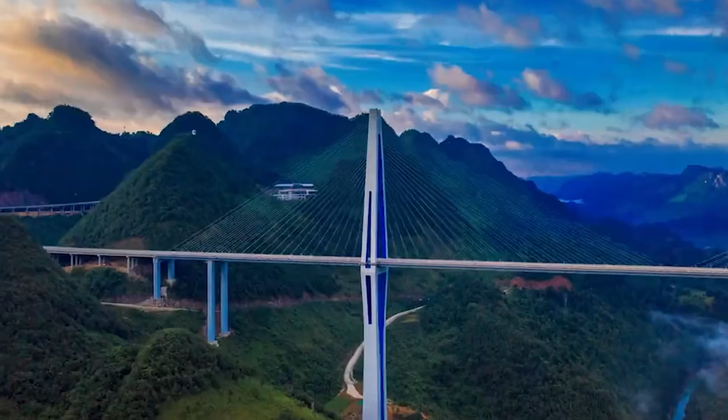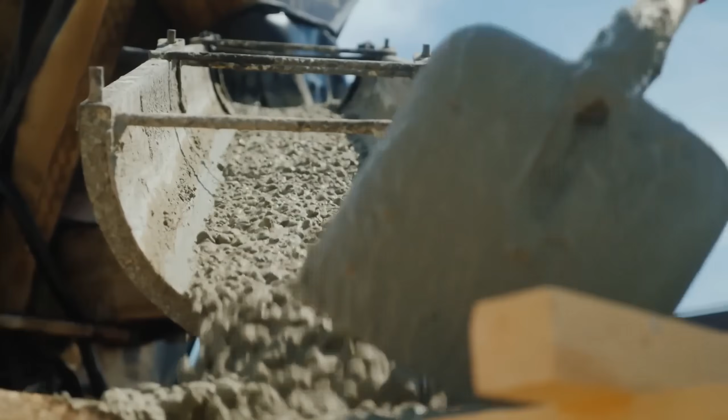Every bridge held together by steel rebar is already rusting from the inside, and nothing can stop it. Not because engineers are careless, not because the concrete is bad. Steel and moisture cannot share 100 years without a fight, and that fight is quietly bankrupting infrastructure budgets worldwide. Right now, in factories most people have never heard of, a different rock is replacing the metal everyone assumed was

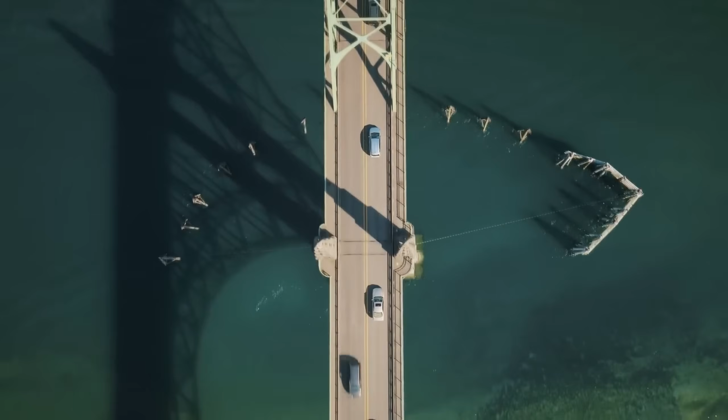permanent. Steel rebar corrosion sounds like a maintenance footnote. It is not. When chloride from de-icing salt or seawater works its way through concrete and reaches the steel inside, the metal begins to rust. Rust takes up more volume than the steel it replaces, so as it expands inside the concrete, it pushes outward, cracking and splitting the surrounding material from the inside out, long before any damage is visible on the surface.

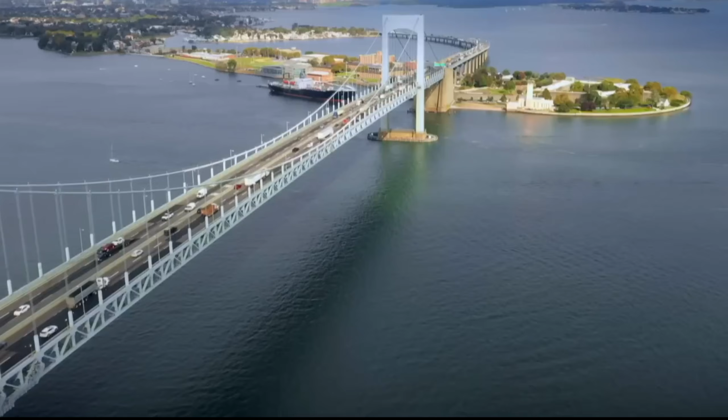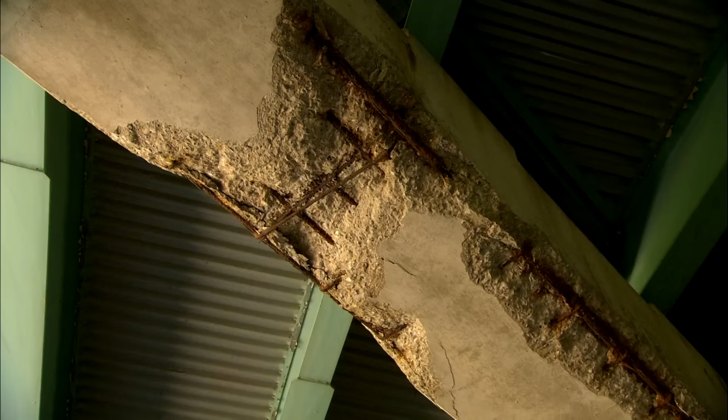The Federal Highway Administration puts the direct annual cost of this process, just for highway bridges in the United States, at roughly $8 billion a year. Factor in traffic delays, lost productivity, and detours, and independent estimates put the real cost at more than 10 times that figure. Corrosion overall, across every industry, is estimated to cost the American economy over $270 billion a year, and reinforced concrete infrastructure is one of its biggest single-line items.

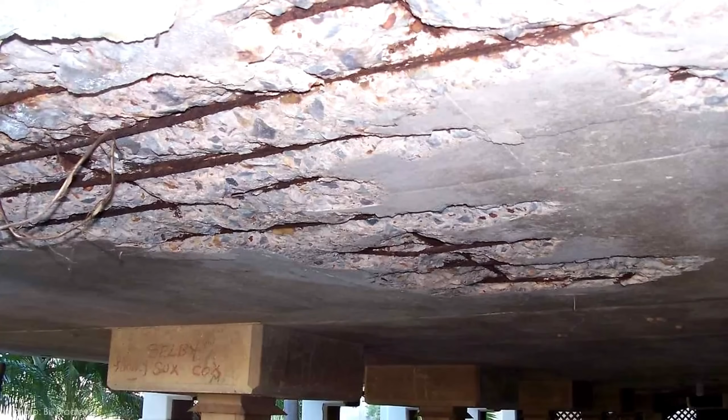This is not a fringe problem hitting a handful of unlucky structures. Over half of the bridges in America are reinforced concrete, and corrosion of the embedded steel is the single most common reason they fail before their design life is up. For more than a century, the construction industry has simply accepted this as the price of building with steel, because nobody had a real alternative. That is no longer true.

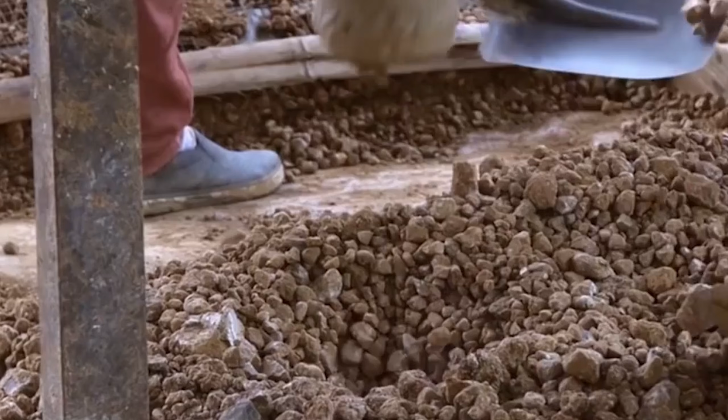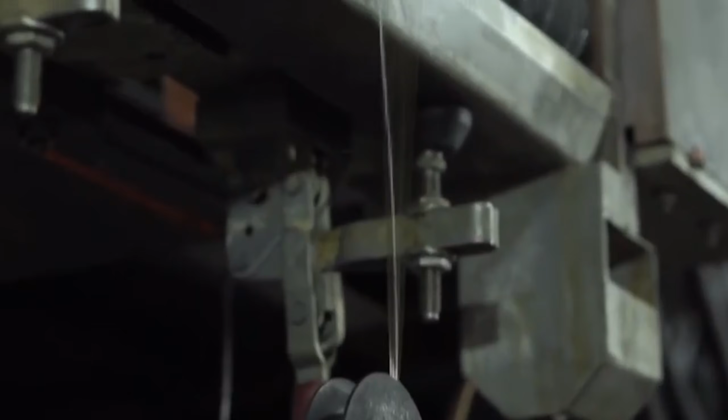The alternative comes from an unlikely place: volcanic rock. Basalt is one of the most common rocks on the planet, and it turns out that when you melt it down and draw it into thread-thin fibers, the same way glass fiber is made, you get something remarkable. Basalt fiber reinforced polymer, or BFRP, is manufactured through a process called pultrusion. Continuous strands of basalt fiber are pulled through a resin bath, usually vinyl ester or epoxy, and cured into straight, ribbed bars that look almost exactly like the steel rebar they are meant to replace.

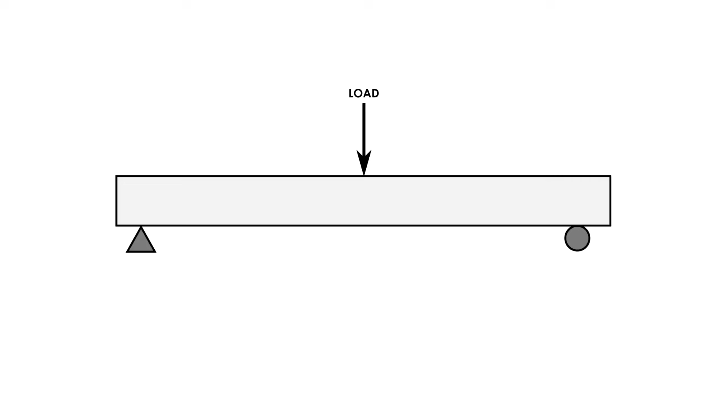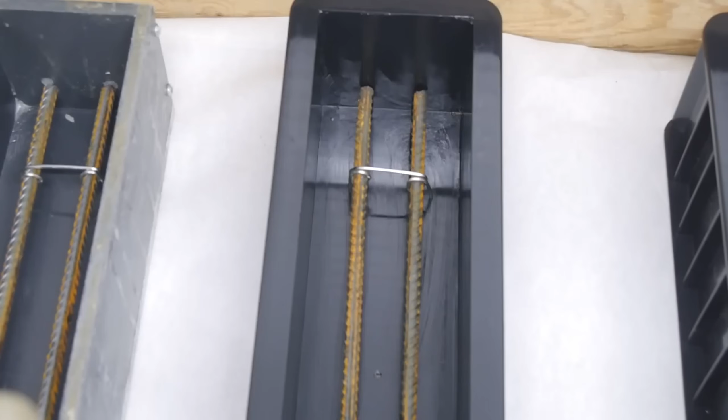The fiber itself sits in strength somewhere between fiberglass and carbon fiber, offering tensile properties higher than standard glass fiber without the extra cost of carbon fiber. And because the reinforcement is stone, not metal, water and chloride simply have nothing to attack. There is no rust reaction to trigger, because there is no iron inside it to oxidize in the first place.

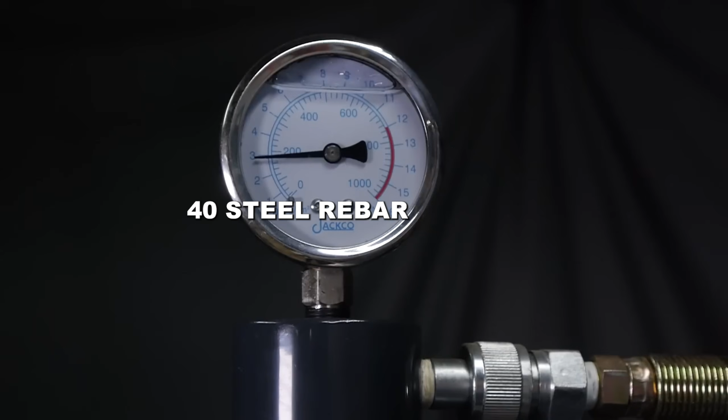Here are the numbers that actually matter to an engineer. Independent testing on commercial basalt rebar puts its guaranteed tensile strength at around 145,000 pounds per square inch, with average results closer to 164,000. Compare that to ordinary grade 40 steel rebar at 70,000, or grade 60 at 90,000. And basalt is not just competitive, it is roughly double the strength of the steel most buildings actually use.

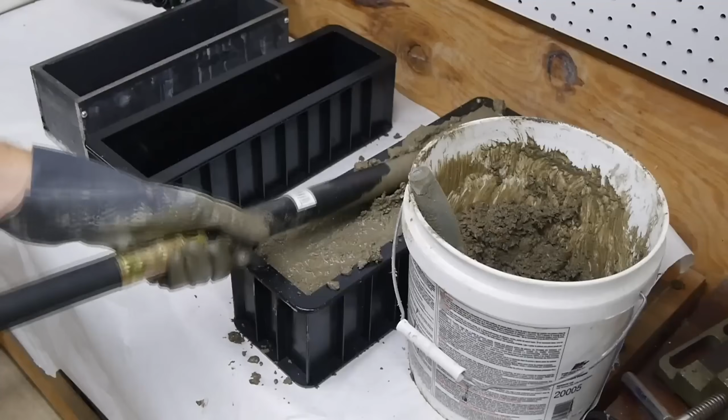It manages that while weighing about a quarter to a third what steel weighs for the same size bar, which means lighter trucks, easier handling on site without mechanical lifting equipment, and less dead load on the finished structure. Density runs around 2 to 2.7 grams per cubic centimeter, against 7.85 for steel.

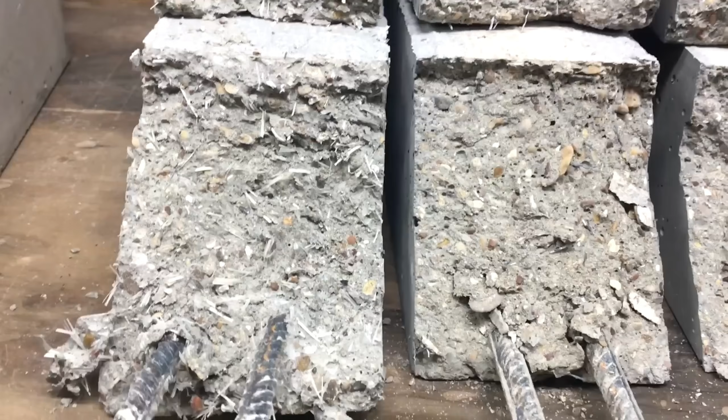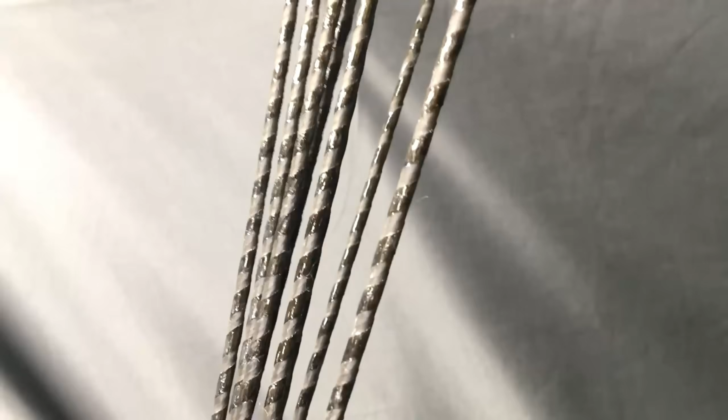Separate research on basalt fiber itself, rather than the finished bar, measured tensile strength as high as 4,800 megapascals in some samples, which is why manufacturers describe it as sitting between glass and carbon fiber, rather than anywhere near ordinary construction materials. For any structure where corrosion, not raw compressive load, is what eventually kills the concrete, that combination is close to ideal.

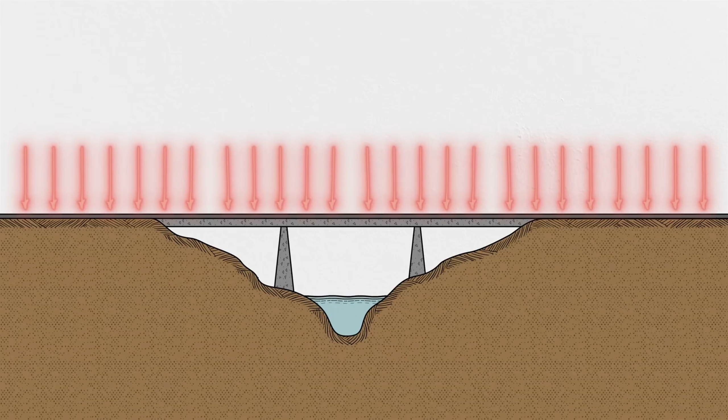The bond between the bar and the surrounding concrete matters just as much as the bar's own strength, and here basalt has quietly outperformed expectations too. Studies on sand-coated, helically wrapped basalt bars found a bond coefficient of 0.8, meaning the bar grips the surrounding concrete more efficiently than the conservative value of 1.4 that codes still assume for ordinary fiber-reinforced bars.

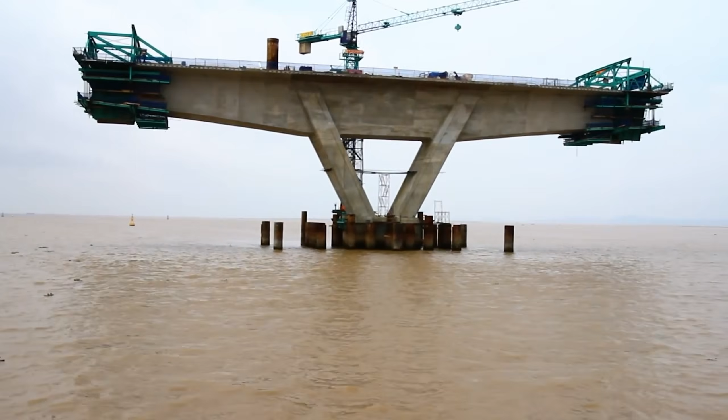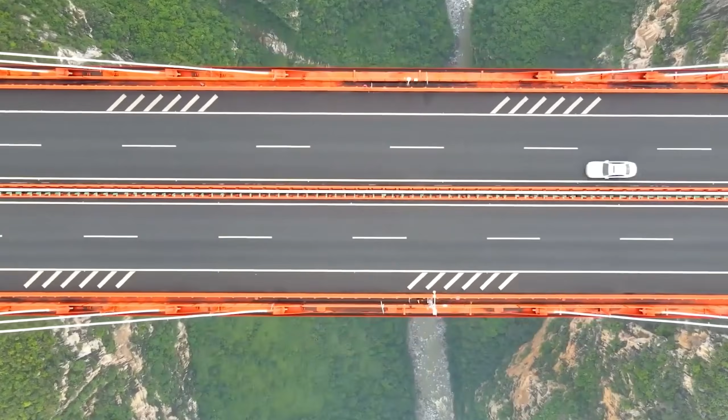In plain terms, engineers currently have to over-design around a safety assumption that the material itself has already outgrown, which is the kind of quiet, unglamorous overperformance that never makes headlines, but matters enormously to anyone actually pouring the concrete. But here is the catch, and it is a real one, not a footnote to bury.

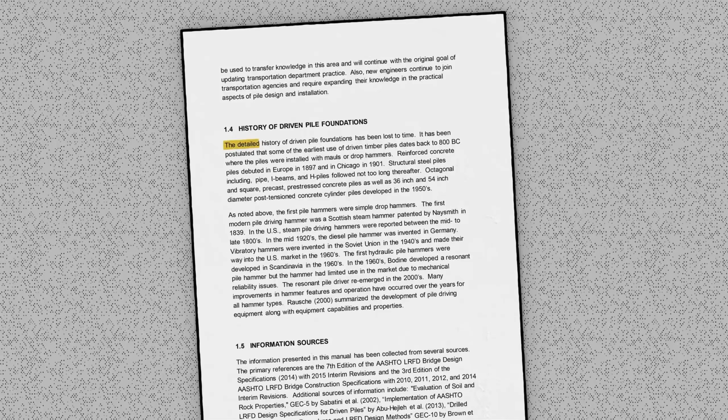Basalt rebar has a modulus of elasticity of roughly 6.7 million pounds per square inch, compared to 29 million for steel. That is more than 4 times lower, and it means the bar stretches noticeably more under the same load. In practice, an engineer designing with basalt often has to size the beam for stiffness and deflection limits rather than raw tensile strength, which can mean thicker sections or a higher reinforcement ratio than an equivalent steel design would need.

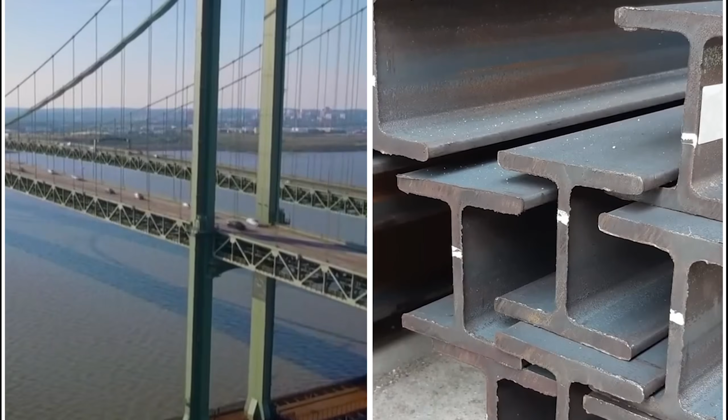And unlike steel, you cannot bend basalt rebar on site with a simple hand tool. Any curved or hooked bar has to be shaped at the factory before it ever reaches the job, which adds a planning step contractors are not used to.

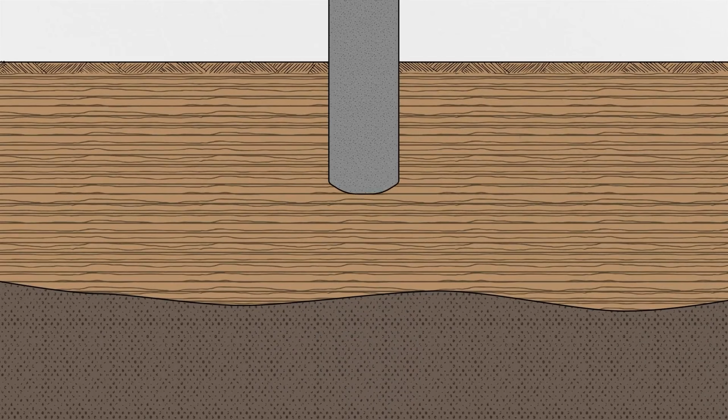For years, that combination of unfamiliar math and factory-only bending was enough to keep basalt rebar filed away as interesting but impractical, sitting next to a dozen other materials engineers had heard of but never actually specified.

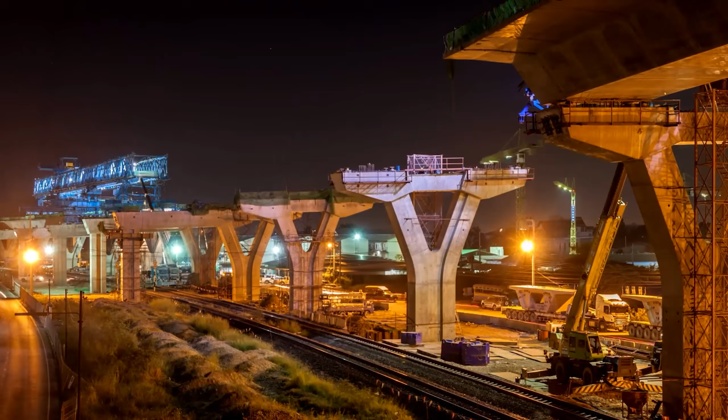There is a second, quieter caveat that researchers are still working through. Basalt fiber's resin coating can degrade over time inside the highly alkaline environment of fresh concrete, where the pH sits above 13. Laboratory studies simulating decades of exposure found that tensile strength retention can drop as low as 25% after 90 days of accelerated aging in that high pH range.

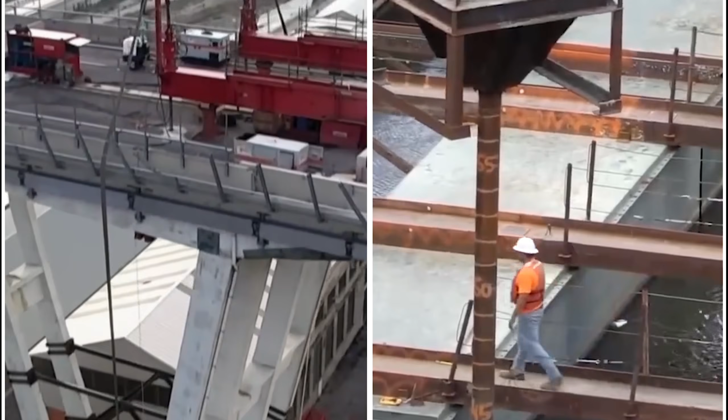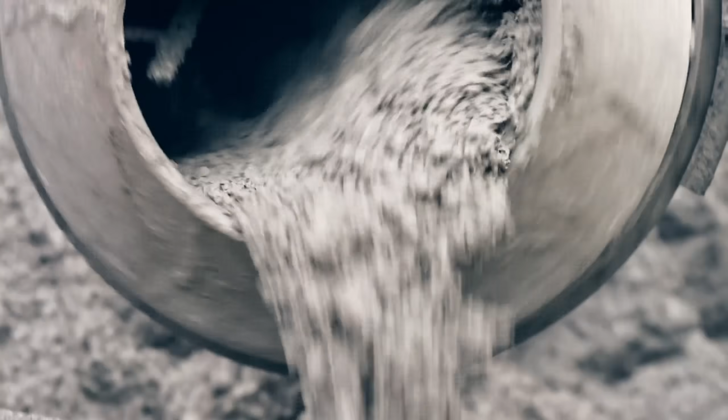But the same studies found retention jumps to nearly 72% once the surrounding concrete carbonates and its pH drops closer to 11, which is what happens naturally over the first years of almost every structure's life as it cures and ages in open air. This is exactly the kind of unglamorous, unresolved detail that never makes it into a sales brochure, and exactly the kind of detail that decides whether a material survives 50 years or fails in 20.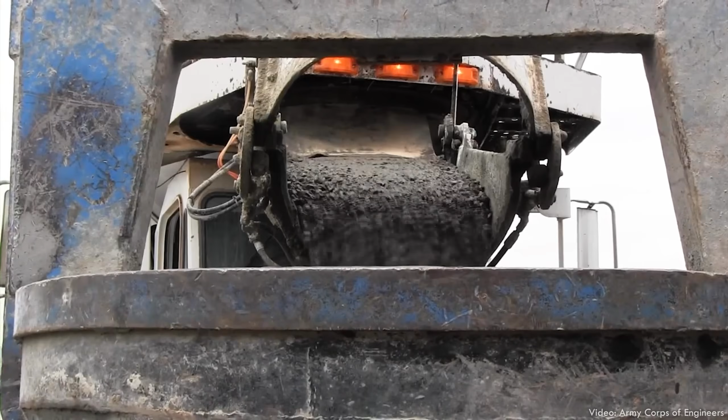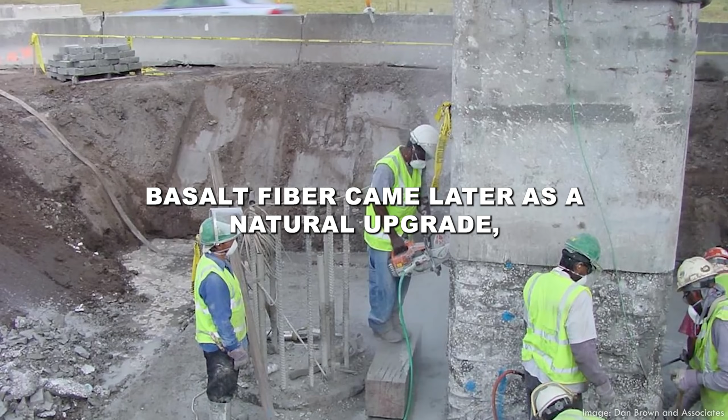None of this is brand new science dressed up as a breakthrough. Fiber-reinforced polymer rebar as a category is roughly 30 years old, and the industry built its early reputation on carbon fiber bars before shifting most of its attention to ordinary glass fiber, mainly because glass offered the best balance of price against the other two. Basalt fiber came later as a natural upgrade sitting between glass and carbon in performance, without carbon's price tag.

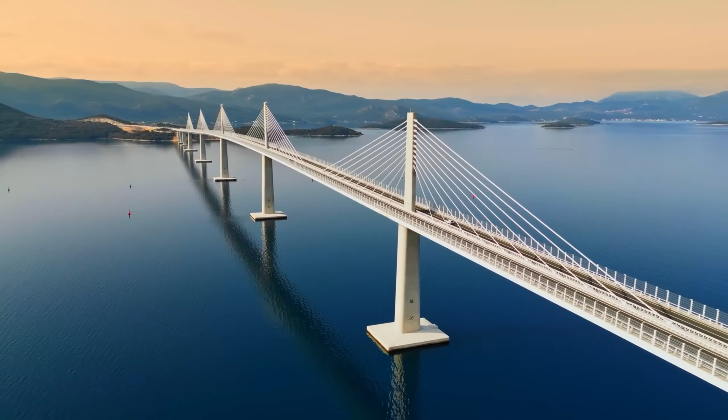That slow, unglamorous evolution matters, because it means basalt rebar is not an unproven experiment riding on a single flashy claim. It is the newest chapter in a reinforcement category that engineers have already been testing, refining, and gradually trusting for 3 decades. What changed is not the material itself, it is the paperwork around it, and paperwork is what actually controls what gets built.

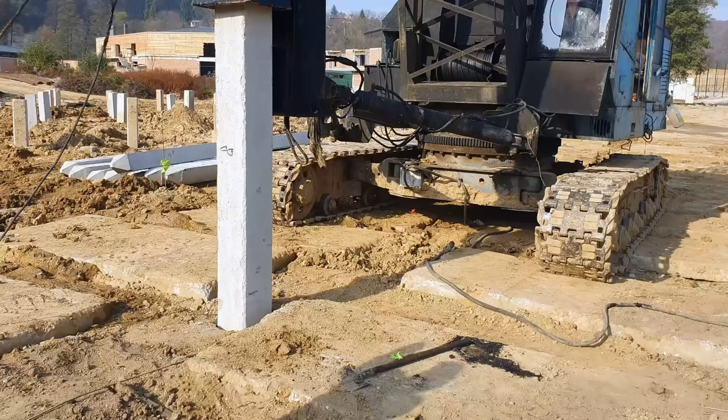For nearly 3 decades, fiber-reinforced rebar existed in a kind of regulatory limbo, tested at universities and used on scattered projects, but without a dedicated national standard that treated basalt the same way building codes treat steel. In 2023, the American Society for Testing and Materials published ASTM D8505, the first specification written specifically to cover basalt and glass fiber rebar side by side with steel grades.

Industry insiders describe how the original plan was to fold basalt into the existing glass fiber specification, the same way steel grades 40, 60, and 80 sit inside one document, but overlapping work with a separate committee developing the American Concrete Institute's newest design guide meant the two efforts had to be kept apart, to avoid creating confusion for engineers already working from the older rules.

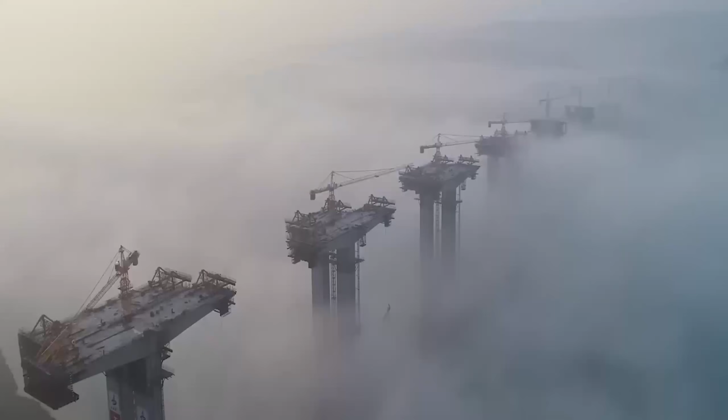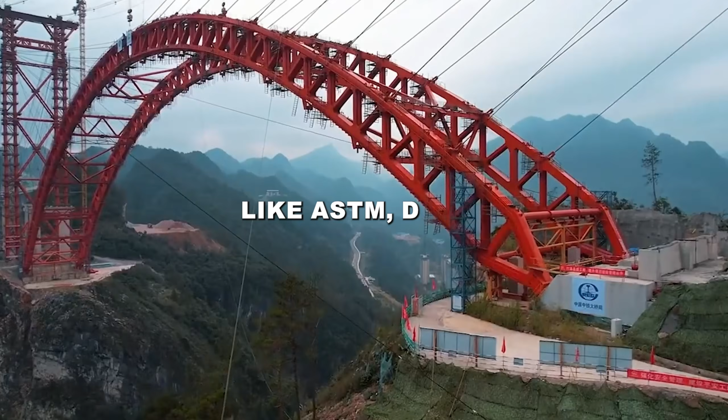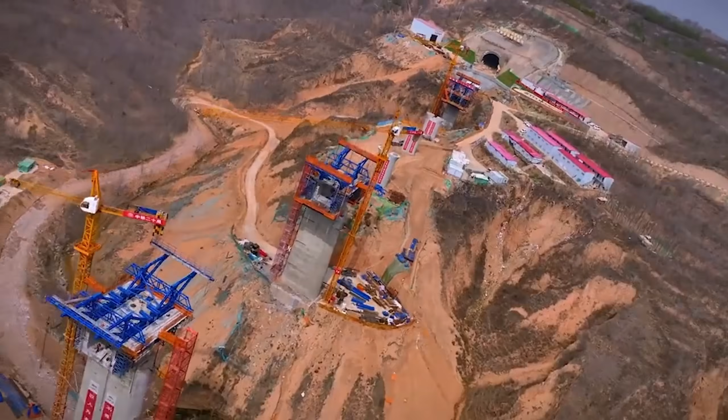The American Concrete Institute's 440 series of codes now spells out exactly how a structural engineer is allowed to design with basalt rebar, referencing test methods like ASTM D7205 for tensile properties. That may sound bureaucratic, but it is the single biggest reason basalt rebar sat on the sidelines for 3 decades. An engineer cannot legally specify a material a building code does not recognize, no matter how good the lab results look. Now it can be specified, inspected, and signed off on, which turns basalt rebar from a laboratory curiosity into something a licensed engineer can actually put their name behind.

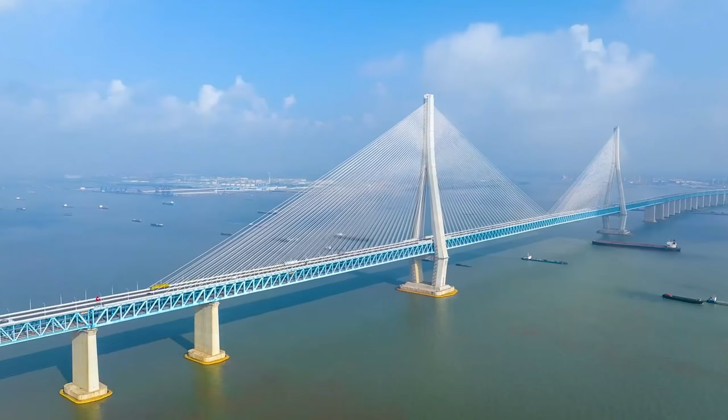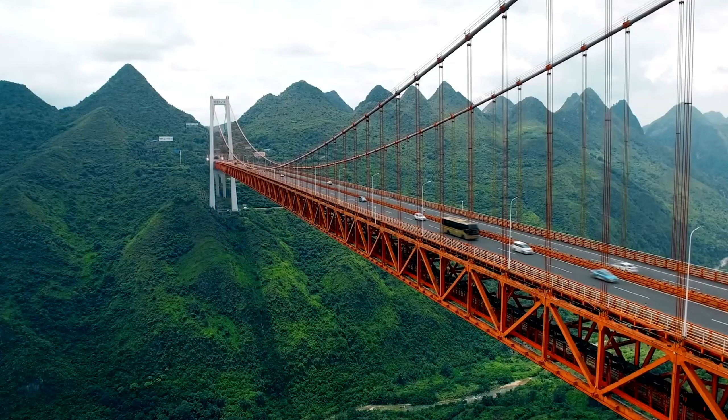That shift in the rulebook has already reshaped where the material gets used in the real world. Basalt rebar is written directly into the national construction codes of Russia, Ukraine, and China, where it shows up routinely in highways, bridges, water treatment plants, and marine structures. In the United States, Canada, the United Kingdom, Italy, and Poland, industry figures describe it as still mostly confined to applications where certification is not required, things like swimming pools and garden paths, while formal certification efforts work their way slowly through the pipeline in each country.

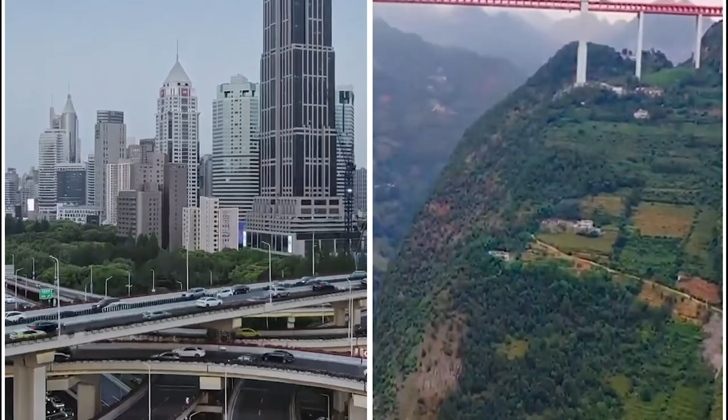That gap has nothing to do with the material performing better in one place than another. It comes down entirely to which regulatory system moved first, and to a construction culture built around liability and insurance that is naturally reluctant to sign off on decades-long performance claims for any material without decades of field data to back them up, even when the lab data already looks strong.

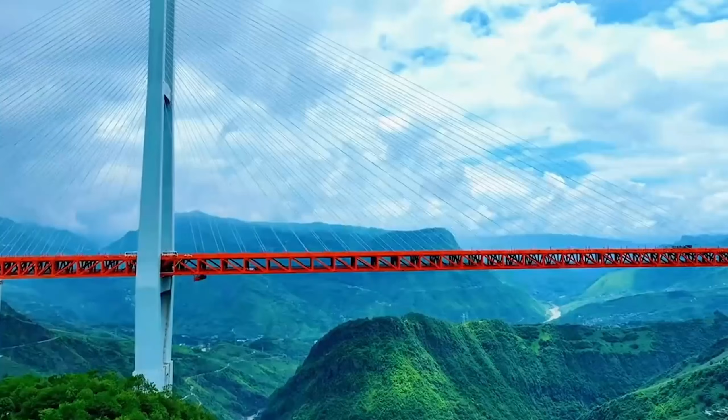That caution is starting to crack, at least in North America. Market researchers tracking the sector put the North American share of the basalt rebar market at around $77 million in 2024, roughly a quarter of the global total, with adoption concentrated almost entirely in coastal and marine projects, exactly the seawalls, docks, and bridge decks where saltwater corrosion is most aggressive and most expensive to repair.

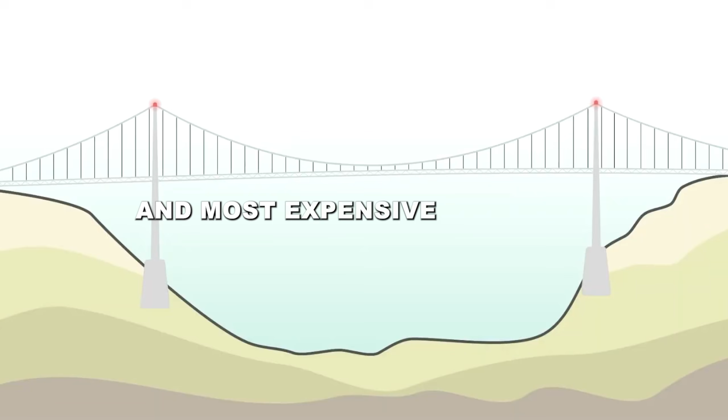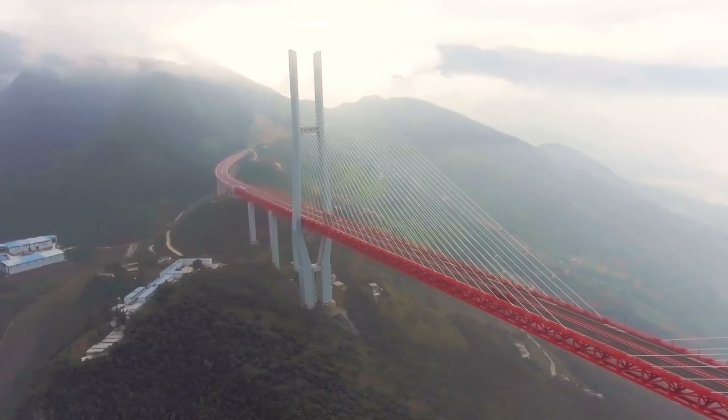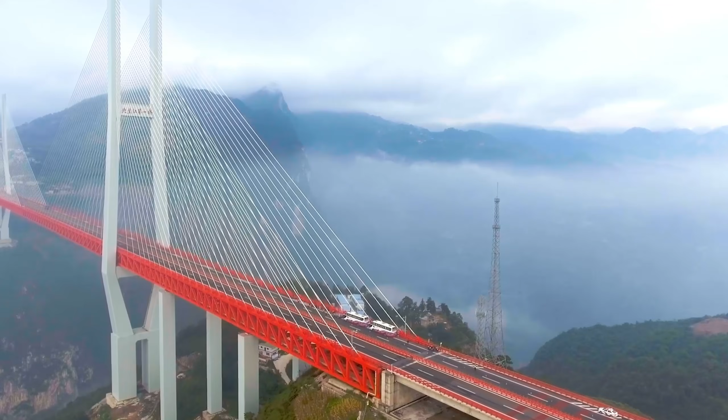Estimates for the broader basalt fiber rebar market put global demand growing at a compound rate in the low double digits through the early 2030s, driven largely by aging infrastructure that needs replacing anyway, and by state and federal building codes that are slowly starting to reward corrosion-resistant materials rather than simply requiring the cheapest one. None of that adds up to a revolution overnight, but it is a market moving in one direction, and that direction is away from steel in exactly the environments where steel struggles most.

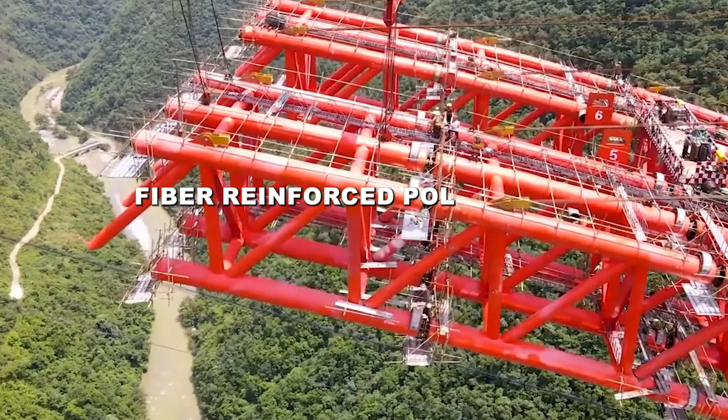China's research institutes and construction firms have pushed the furthest with basalt fiber reinforced polymer in bridge components, specifically because it never rusts, which makes it the obvious choice for bridges sitting in salt spray or acidic soil.

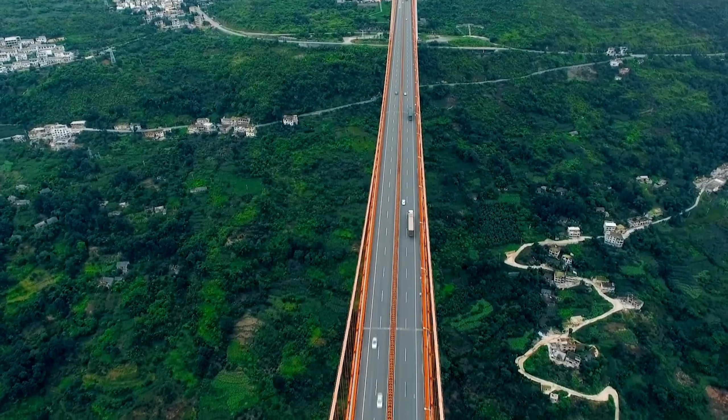Exactly the environments where steel rebar fails fastest and most expensively.

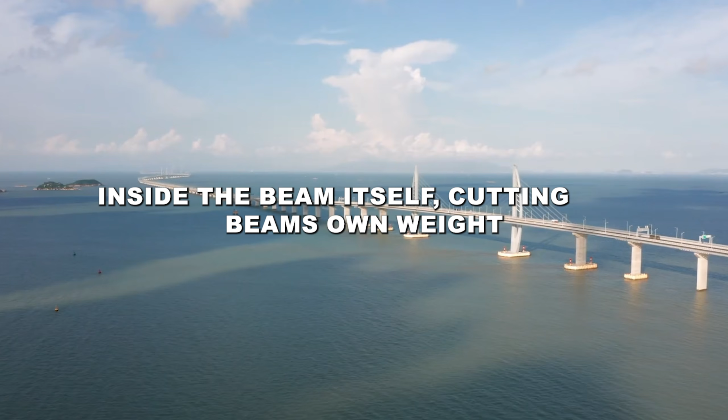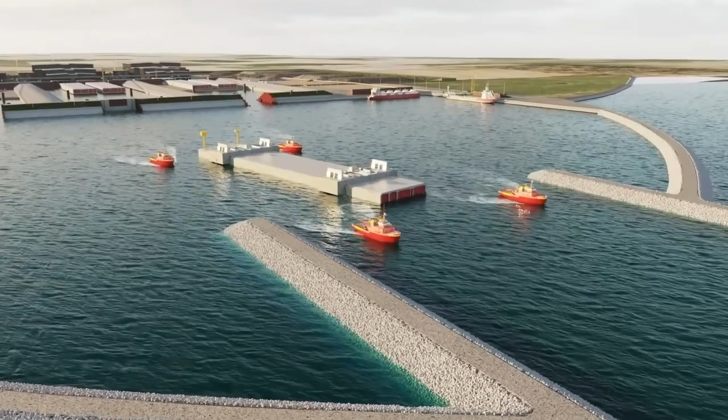Some of that engineering work goes further than simply swapping one bar for another inside an otherwise ordinary beam. Researchers have built composite bridge sections where a full grid of fiber-reinforced polymer takes the place of the solid steel web inside the beam itself, cutting the beam's own weight substantially while keeping its resistance to shear forces intact. Lighter beams mean smaller cranes, cheaper transport to remote sites, and faster assembly on location, which is a very different kind of advantage from winning a price war on raw tonnage of finished steel.

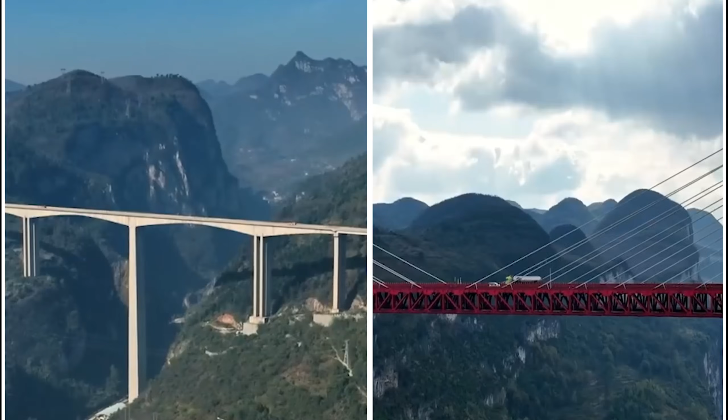Separate testing on pre-stressed basalt fiber beams found they could carry roughly 20% more load before failure than non-pre-stressed versions, and could sustain about 5 times the load before the first visible crack ever appeared, which is exactly the kind of long service life performance coastal and marine infrastructure is desperate for.

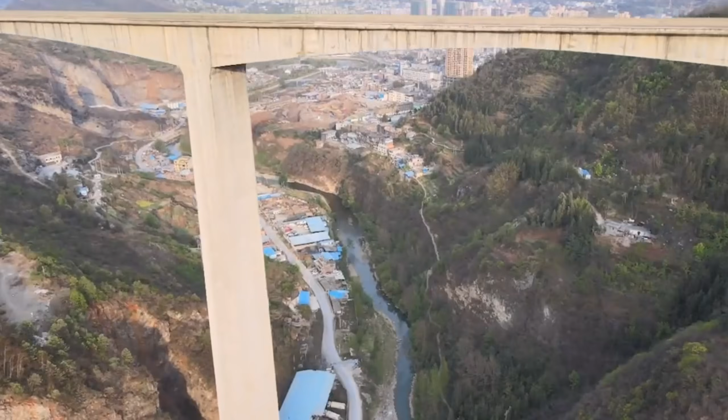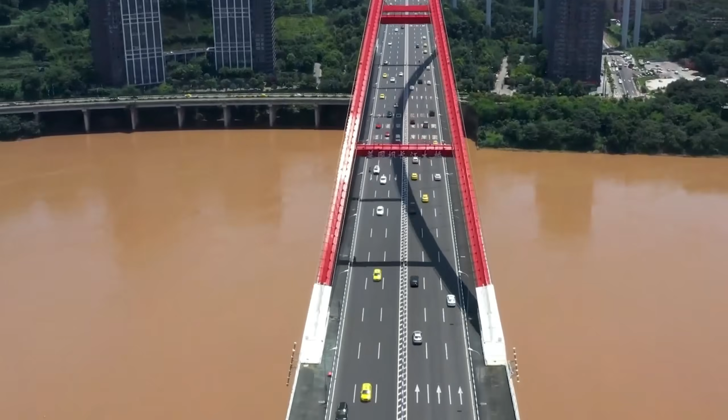Bridges are the headline application, but they are not the only one. The same corrosion resistance that makes basalt rebar attractive for seawalls and coastal decks also makes it useful in wind turbine foundations, which sit exposed to weather for decades with almost no chance of inspection or repair once installed, and in wastewater treatment plants and chemical facilities, where the concrete itself is under constant chemical attack from the inside as well as the outside.

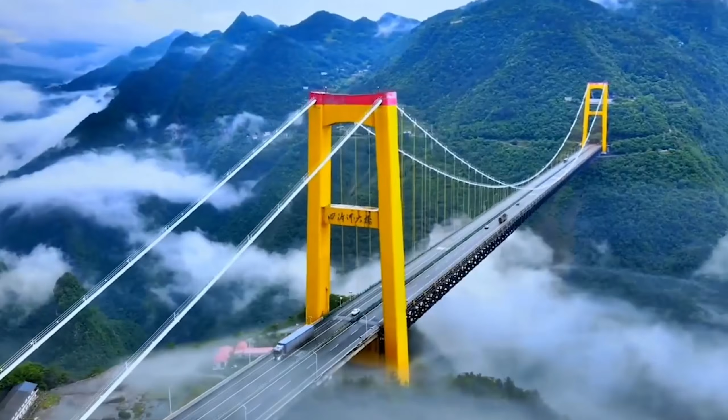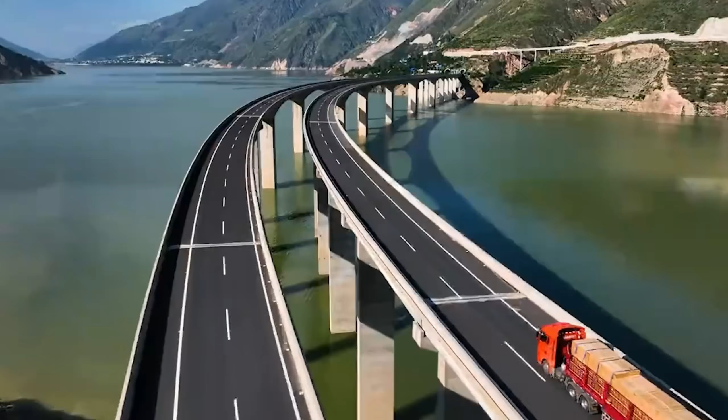Tunnel linings and underground engineering projects use it for a more specific reason. Basalt rebar is non-conductive and non-magnetic, which matters enormously in any structure built near sensitive electrical equipment or where steel's magnetic interference would otherwise be a problem. None of these are billion-dollar headline projects. They are the unglamorous backbone of everyday infrastructure, which is exactly why a material fixing them quietly does not make the evening news.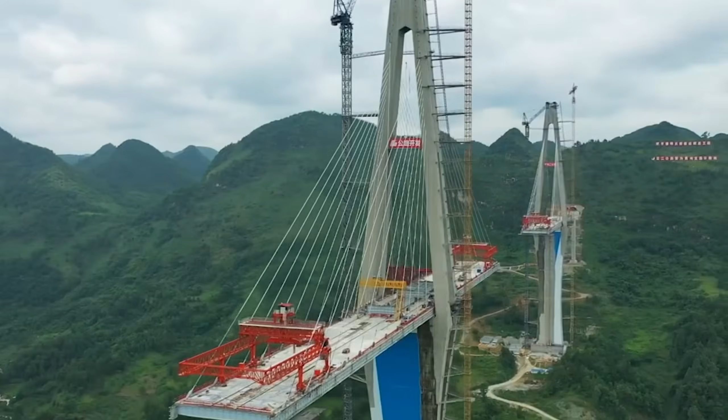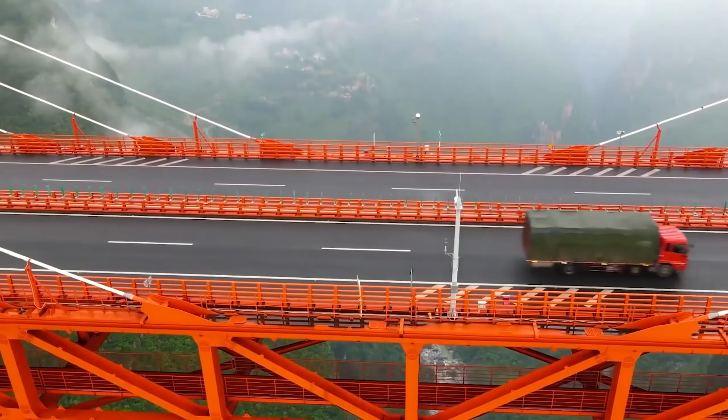None of this makes basalt rebar a universal replacement, and it is worth being honest about where it stops. It cannot be used in columns or other elements that rely mainly on compressive strength, because fiber-reinforced bars, basalt included, are simply weaker in compression than steel is. And in countries where certification still lags, engineers face a slower, more cautious approval path, no matter how strong the underlying material actually tests out to be.

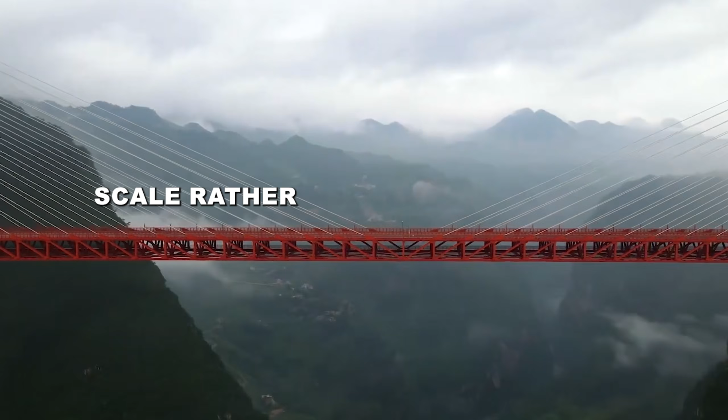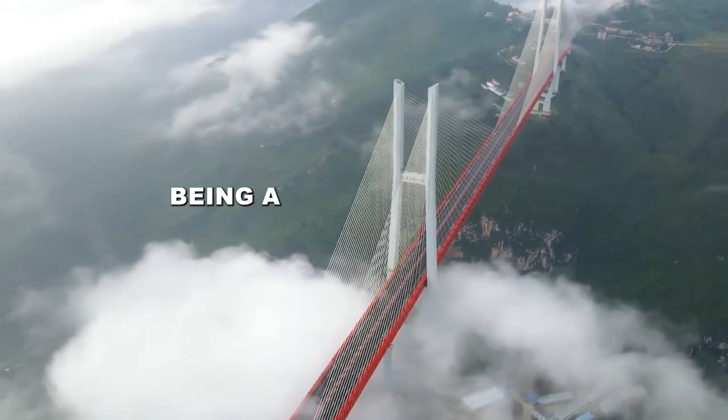What has shifted the underlying economics is price. Manufacturers now say basalt rebar can be bought at close to the same cost per bar as ordinary steel rebar, while offering physical properties that beat steel in the one place it consistently fails over time: corrosion. If that price claim holds up at real construction scale rather than just in supplier marketing, basalt rebar stops being a premium material reserved for niche coastal projects and starts being a straightforward substitution anywhere salt, moisture, or acidic soil are already quietly destroying steel-reinforced concrete.

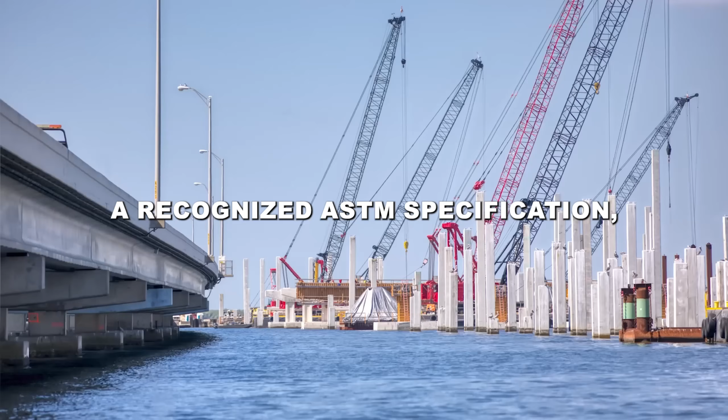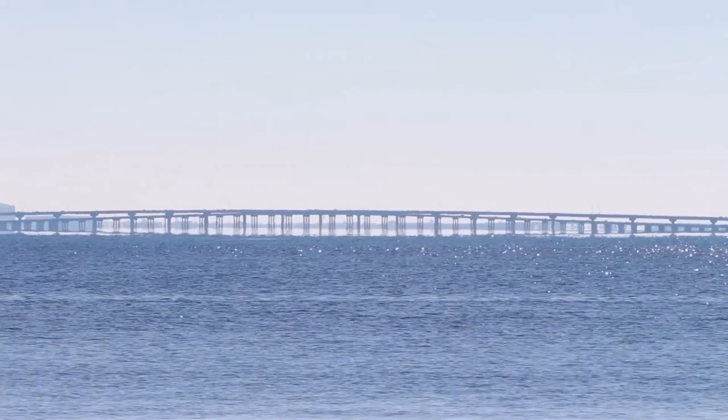It is worth being skeptical of any manufacturer's pricing claim on its own, since a supplier's website is not an independent source. What makes the claim worth taking seriously is that it is no longer being made in isolation. It now sits alongside a recognized ASTM specification, a matching set of ACI design codes, and a market that independent researchers track, growing at double-digit rates rather than a single company's press release. That combination of code recognition and third-party market tracking is a meaningfully different situation than a novel material claiming to beat steel with no paper trail behind it.

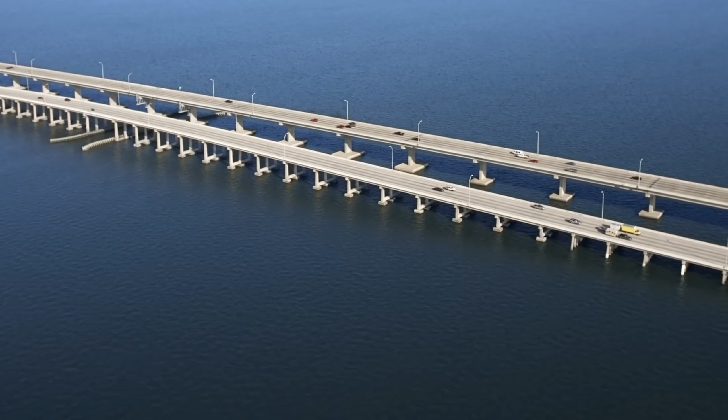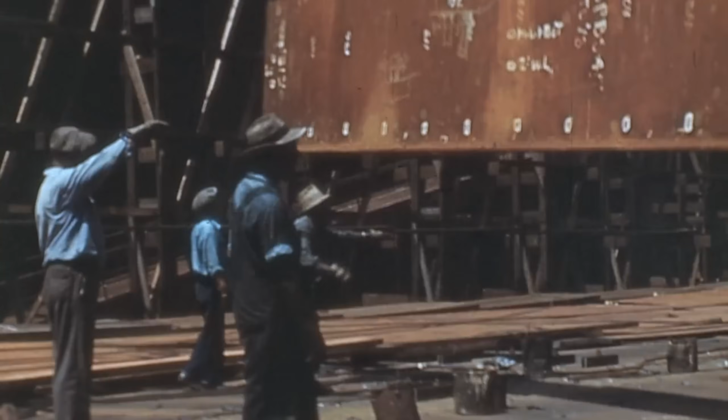Part of why so few people have heard any of this is simple. Steel dominates every headline about materials and geopolitics, from advanced high-strength alloys to trade tariffs to who controls which mine. A quiet fiberglass-style bar used mostly in bridge decks and seawalls does not generate the same kind of coverage, even when it is solving a more expensive, more universal problem than any of those stories.

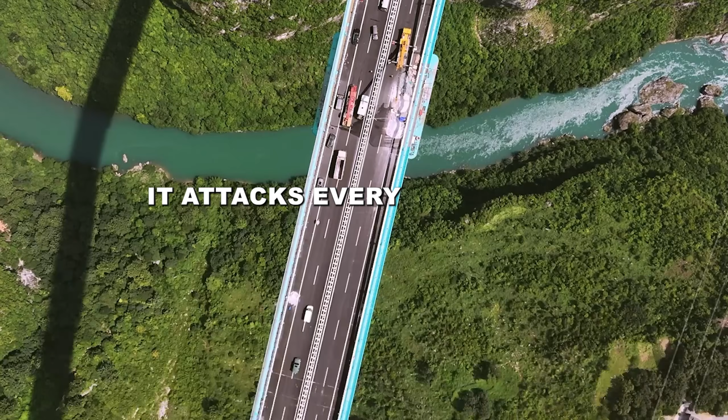Corrosion does not care about trade policy or national pride. It attacks every reinforced concrete structure on Earth, in every country, regardless of who built it, and a fix for that problem is arguably more consequential to the average person's daily infrastructure than almost any of the louder material stories getting all the attention.

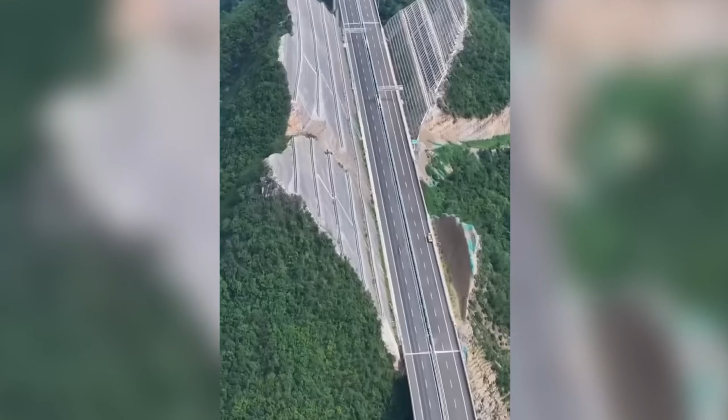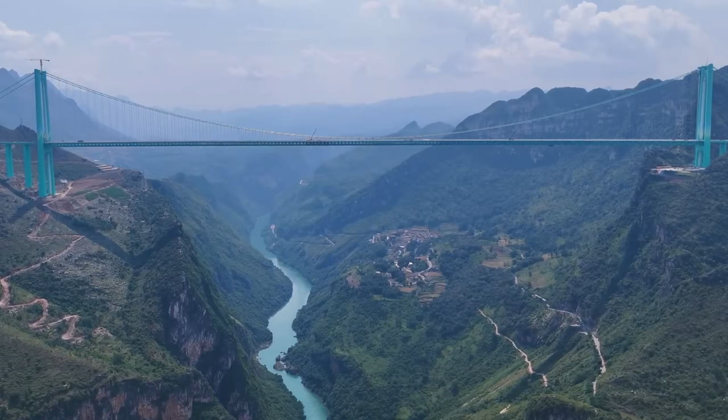Step back, and the real story here is not one country racing to dominate one more headline material. It is a 100-year-old assumption quietly breaking apart. Reinforced concrete was built on the idea that steel and concrete simply belong together, rust and all, and that the resulting repair bill was just the unavoidable cost of building anything meant to last.

Basalt rebar does not ask governments for billion-dollar subsidies, does not require new factories costing hundreds of millions of dollars to retool, and does not depend on any single country's mining supply chain the way advanced steel alloys increasingly do. It asks for something far smaller and far less dramatic, a building code willing to catch up with what the lab results have already shown for 2 decades.

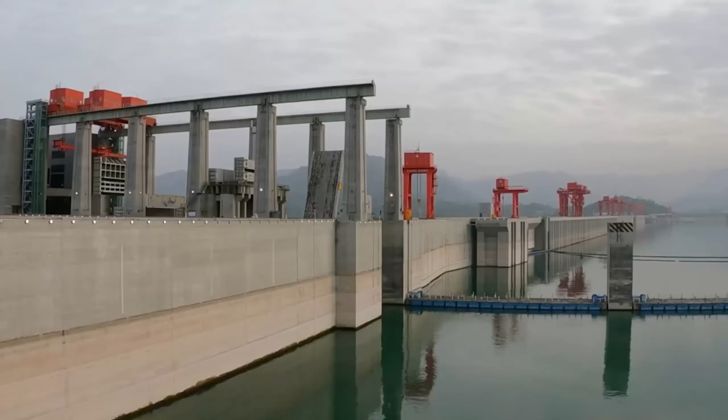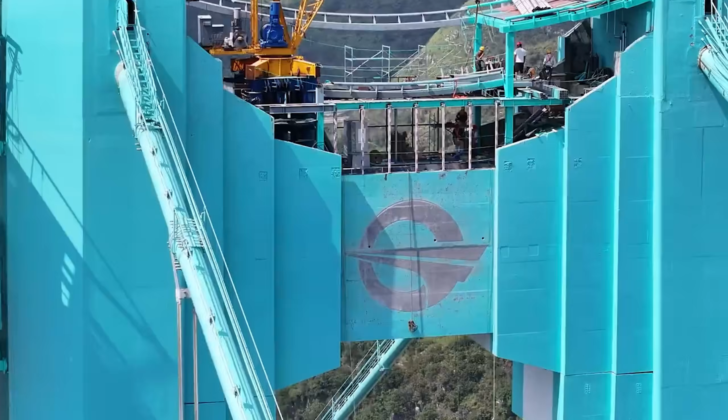Where that catching up has happened, in Russia, Ukraine, and China, the material is already holding up bridges. Where it has not, across much of the West, it is still sitting quietly in garden paths and swimming pools, waiting its turn. The next bridge that never rusts might be made of melted rock, not steel.